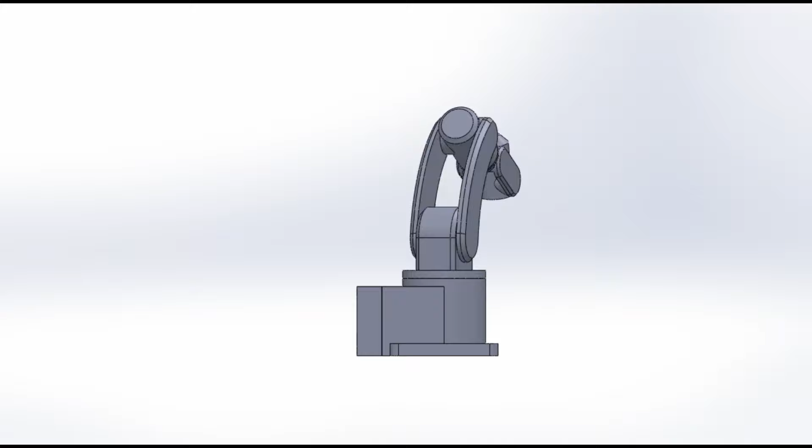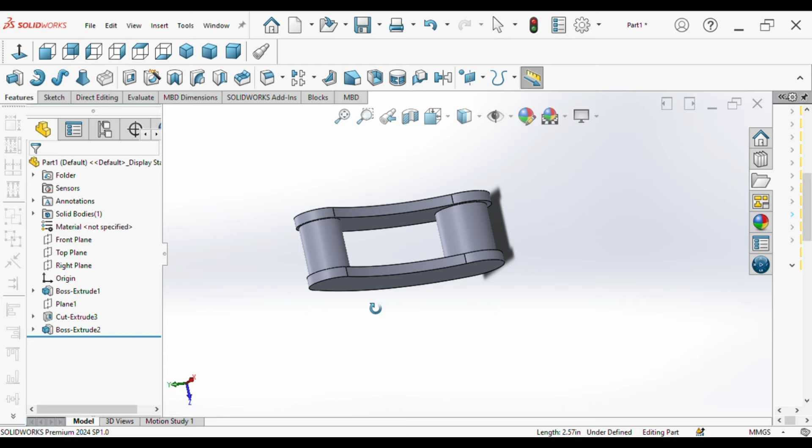This is part 5 of the videos where we create a robotic arm which draws circles of different sizes. We have a series of videos from part 1 up to part 8 where we create only the parts of the robotic arm, then video 9 where we assemble them into a complete product. This one is forearm number 1, another part of our robotic arm, and we are going to create a duplicate of this one from scratch.

Without wasting much time, we press Ctrl N for our new part, click OK, and it shows us the dashboard where we create our forearm number 1 from start. Before everything, we have to convert the units to millimeters, so click millimeters here. Now you select front plane, sketch.

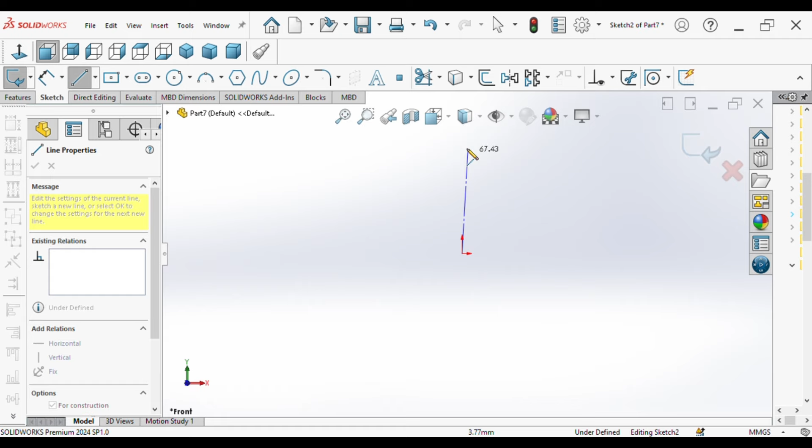Now select your center line, and after selecting it, draw a line which goes all the way up to here. Exit sketch, click the line for dimensioning. You can see there is 72 there. We have to put 150. Click OK, so now we have our line.

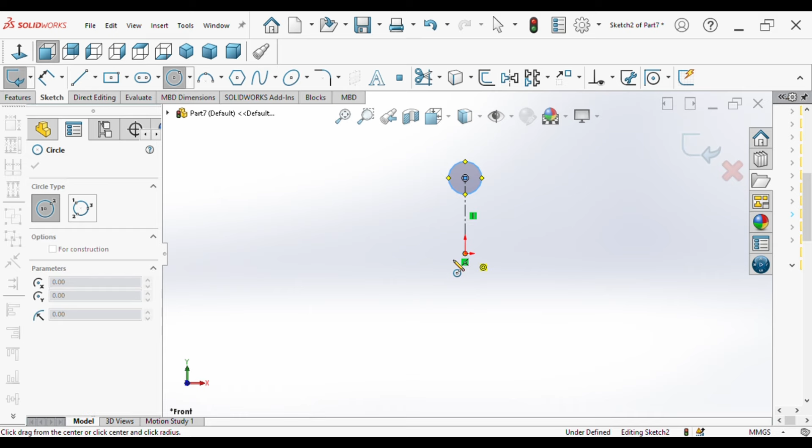We have to select a circle. We draw 2 circles, one above, one beneath. Exit sketch, click the circle again for dimensioning. That one we want a radius of 22.5, click OK. The one beneath we want a radius of 30, click OK.

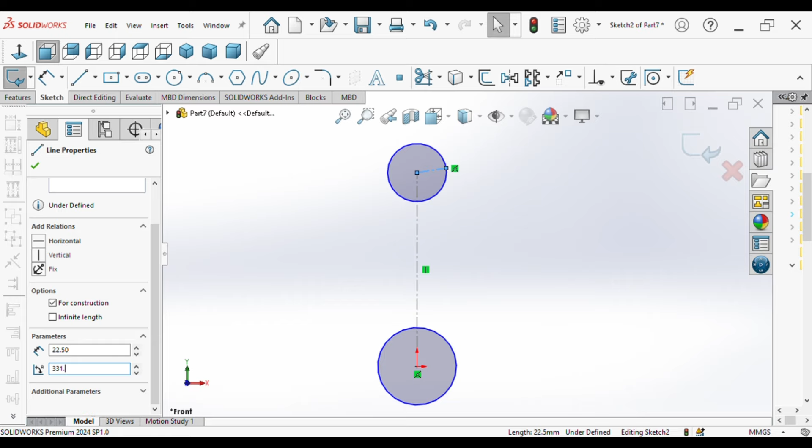After that, again we select our center line, click it, then exactly at 22.5 we release our mouse. Exit sketch, click the line for dimensioning. This one we are only interested in its angle, where its angle is supposed to be at 331.9. Click OK.

Again, click the center line and draw another line here. We are only more concerned about the angles. The angle for this one is 37.1. Click OK, we're almost done.

Center line, then click angles, click exit, click the line. Only interested in angles, the angle here is 157.8. Almost done, it's very simple.

Zoom in, zoom out for you to see clearly, then do it like this and exit sketch. You have to check it's 30, yes. It's 180, no, we don't want 180. What do we want? We need 203 here. Say OK.

Our line here must be 203, it must change. I don't know what's going on, so what I'm going to do is cut it, then reselect center line again, come here, put it at an angle, exit sketch, select the line. Now I can put my 203. Simple, almost done.

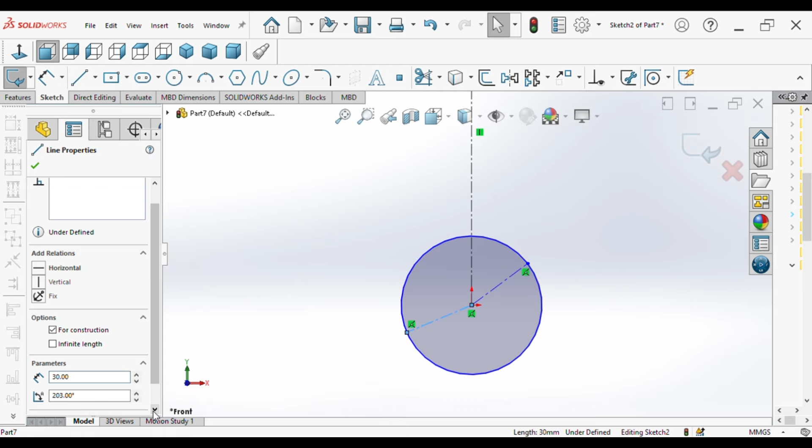Let me check what's going on here. My 203 is there. Alright, so what's left now is you select a 3-point arc.

You came here, exactly here - oh sorry, I didn't select anything. I have to select a 3-point arc, come to this point, join it with this point. Now I need 150 here, so I just have to leave it very near. At 157 it's okay.

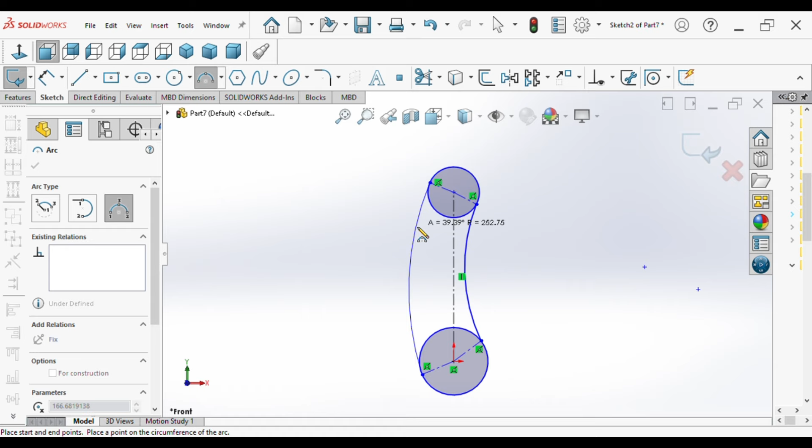You have to come back here, join with this one again. I need 200 here, just very near. It's okay, now exit sketch.

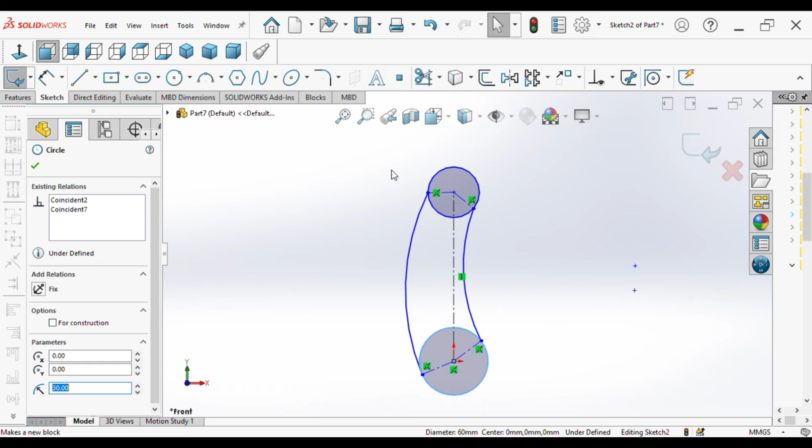Rechecking my circle, is it still 20? No, it's supposed to be 22.5, redimensioning it. What about this one? It's supposed to be 30, yes it's 30. So after that, we have to say features, extrude boss base.

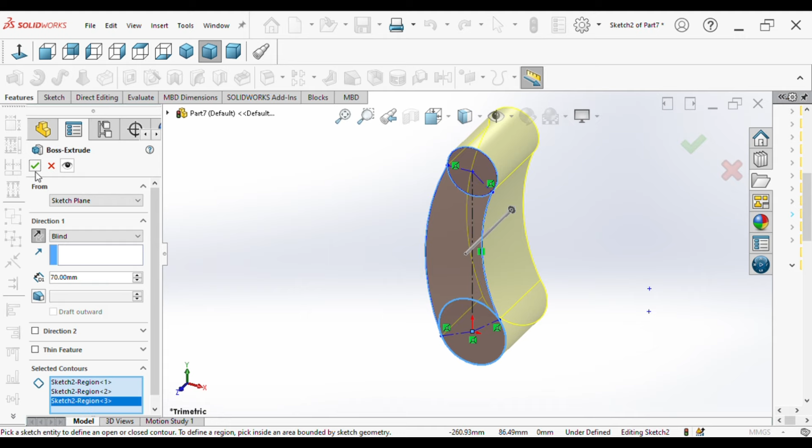You flip direction so that it may suit your direction. You click here, you click here, you say I want to extrude it with 70 millimeters, and click OK. Now if you click OK, you see that we are almost there.

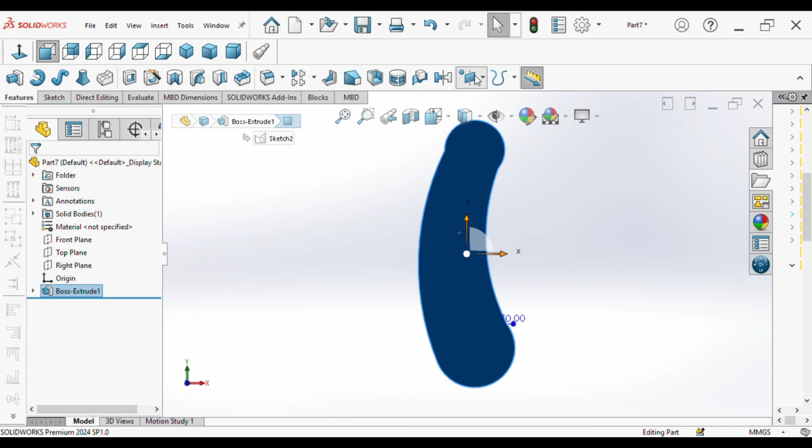We are just left with cutting this part and making sure we have some circle pillars here and here. So we select this face, saying normal to. We go to reference geometry, select plane. After we select our plane, we want to flip this direction because we don't want this direction, so we go down all the way with the flip normal.

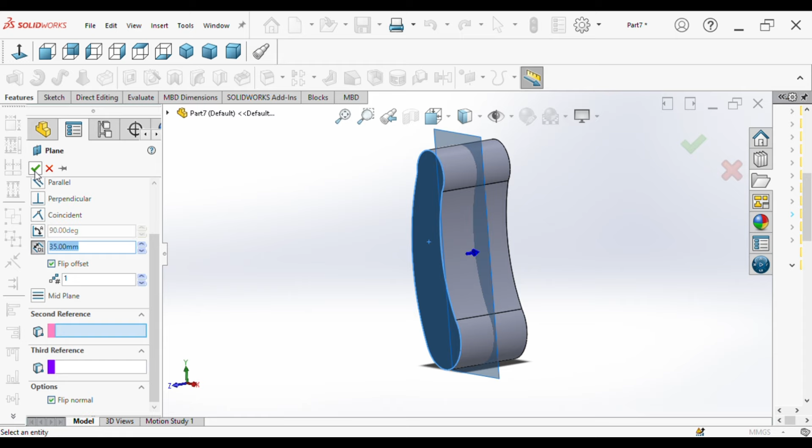Now it's going inside, now we have to say flip offset. It's now in between, this is where we want to cut, to cut from 25 aside, 25 aside. Click OK. Now we click the plane, click sketch, select the face, say convert entities.

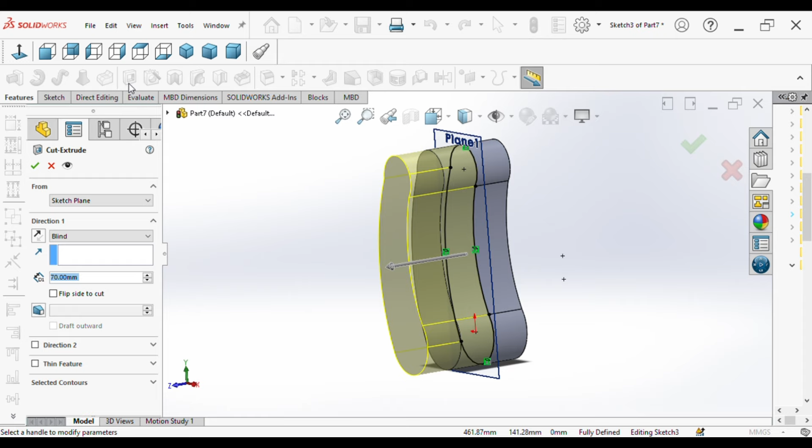After convert entities, we go to features, extrude cut. Now we want to cut 25 millimeters in both directions - 25 millimeters first direction, 25 millimeters second direction, and click OK. Then when you see bodies to keep, we have to keep all bodies, click OK.

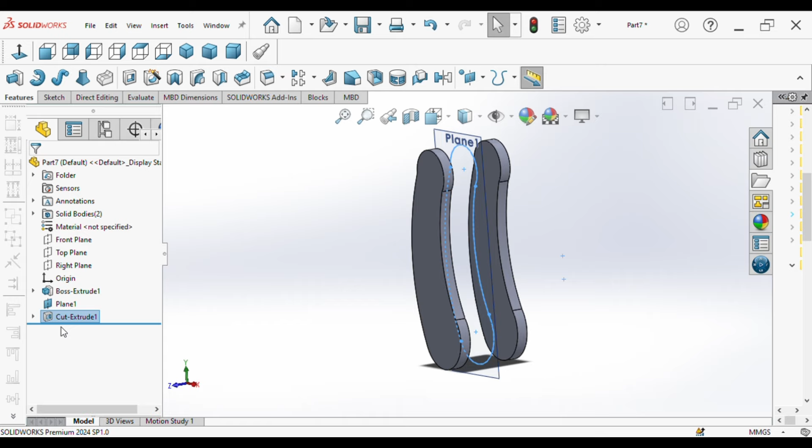Now we are almost there. We have to click it here on the plane, then hide the plane so we can construct our thing clearly. Click on there, click sketch, select the circle. If you place your cursor here, you see there is a center, tracing a center.

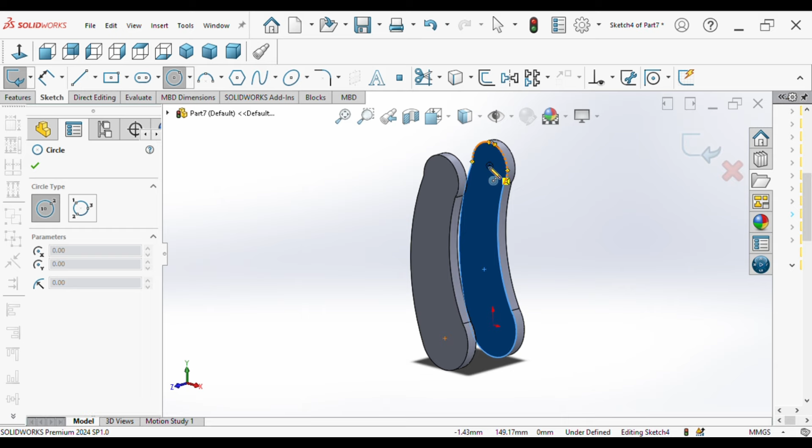You click at the center, draw a circle, just a normal circle, trace again, go to center, click again. Now exit sketch, click that circle. You want a radius of 20, say OK. Here we want a radius of 25, click OK.

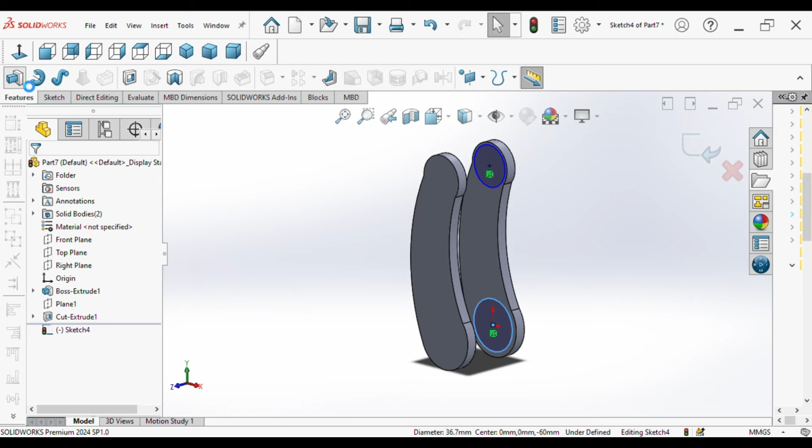Alright, we have to go to features again, we now want to extrude it, so we extrude it with 50 millimeters now, click OK. So this is what we needed at first - this is our forearm number 1, exactly as it was. This is the duplicate now.

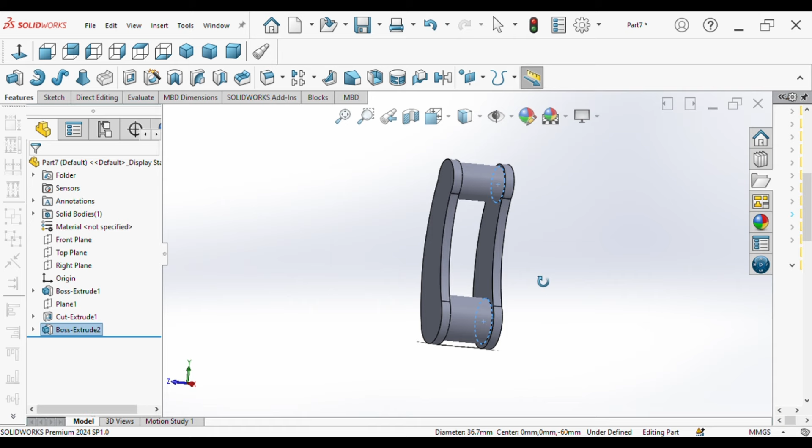Now we have to move on to create our forearm number 2, because we have got 3 forearms. This is our forearm number 1, now we are moving on to do our forearm number 2.